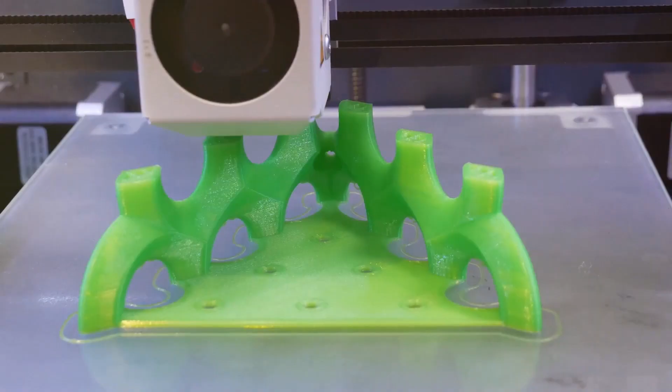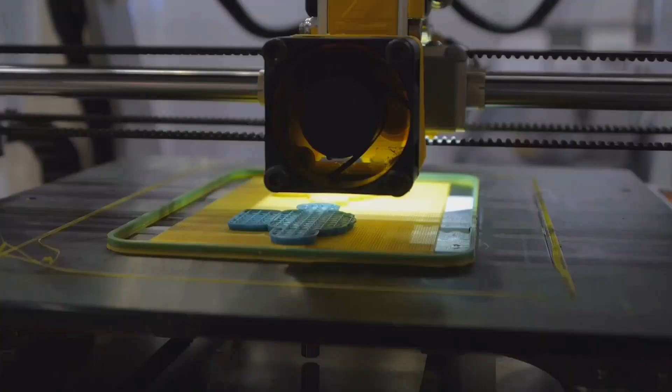In the heart of Devil and Dove, a unique fusion of traditional craftsmanship and modern technology thrives. It's a place where intricate jewelry making intertwines with the precision of 3D printing, giving birth to unique pieces steeped in personal narratives. Today, we delve into the intricacies of preparing 3D print files, a crucial element in our creation process that echoes our commitment to overcoming personal and health challenges.

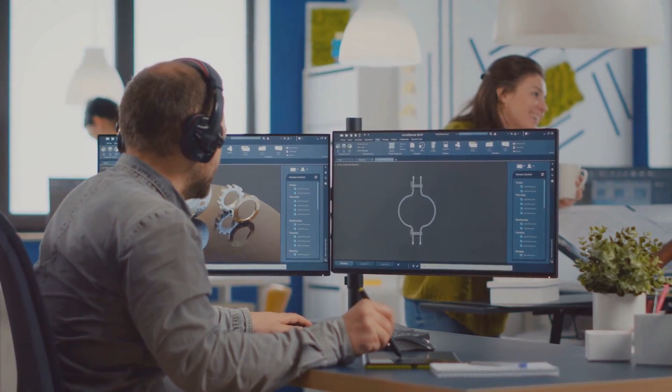3D print file preparation forms a pillar of our craft, a meticulous process that starts with the selection of the right CAD software to design and export our creations.

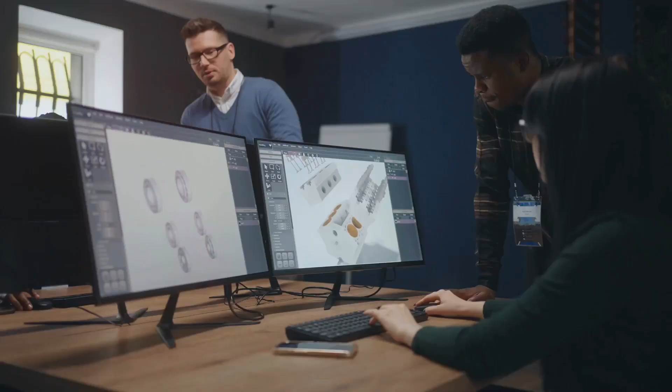The quality of your STL files is paramount, directly influencing the detail and accuracy of your final print. It's a delicate balance, understanding the interplay between high resolution for detailed designs and the limitations of your printer's capabilities.

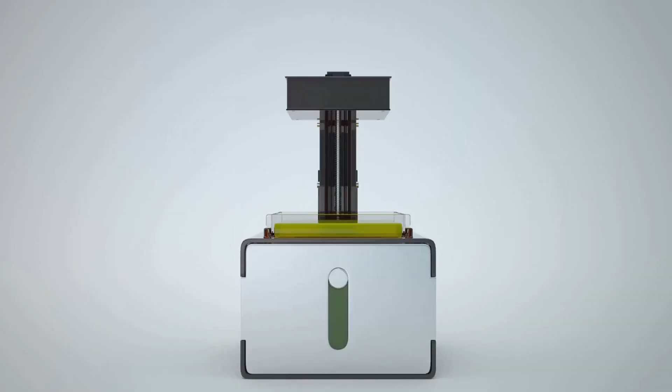The export settings, like chordal and angular tolerance, are equally significant. These settings determine how closely your printed piece will mirror the original design, impacting the smoothness and overall integrity of the final product. By optimizing these settings, we ensure each piece we create meets our high standards of quality and craftsmanship.

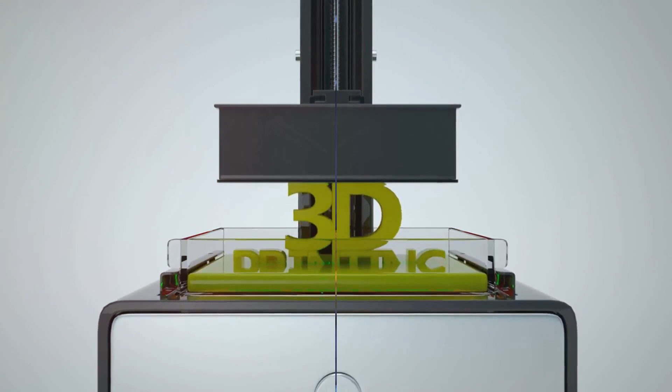The backbone of 3D printing lies within STL files, an acronym for stereolithography. Despite its simplicity, allowing for efficient printing processes, it comes with certain limitations, such as the lack of color and texture detail. However, its compatibility across various software platforms makes it an invaluable asset for us.

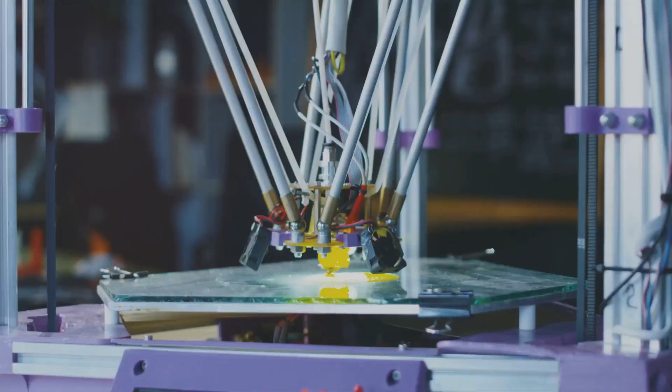Choosing software that supports STL files, from CAD applications to mesh editing tools and slicer software, is crucial. These tools enable us to refine our designs, ensuring they're not only aesthetically pleasing, but also structurally sound and true to our artistic vision.

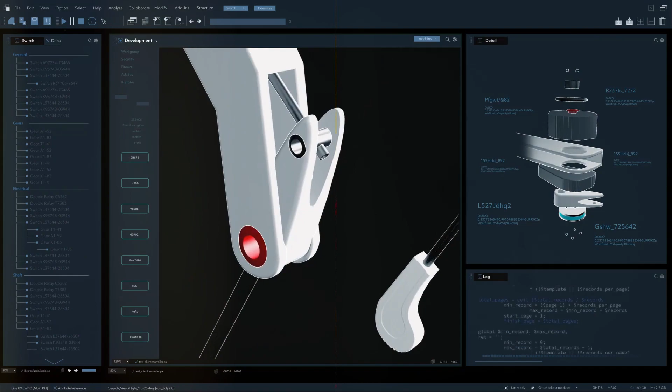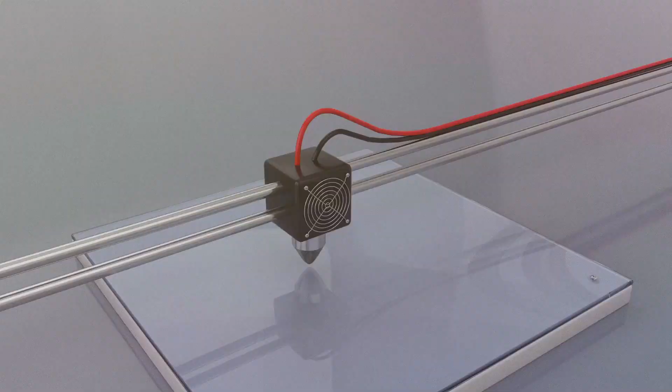Every piece we create at Devil and Dove is a testament to our journey, showcasing resilience and creativity in the face of adversity. Your support enables us to continue pursuing our passion, bringing unique jewelry pieces into the world.

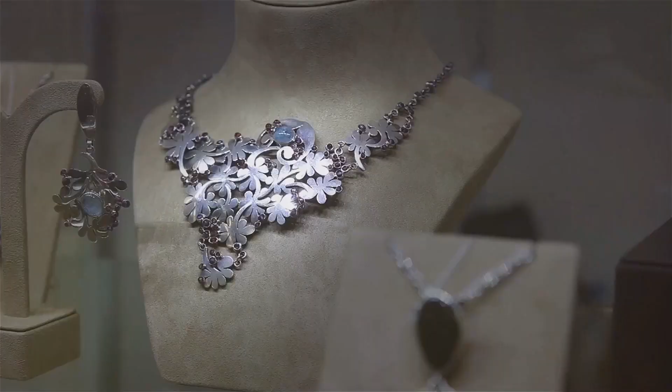Each piece is a reflection of the dedication and perseverance behind Devil and Dove, and by supporting us, you become a part of our extended family.

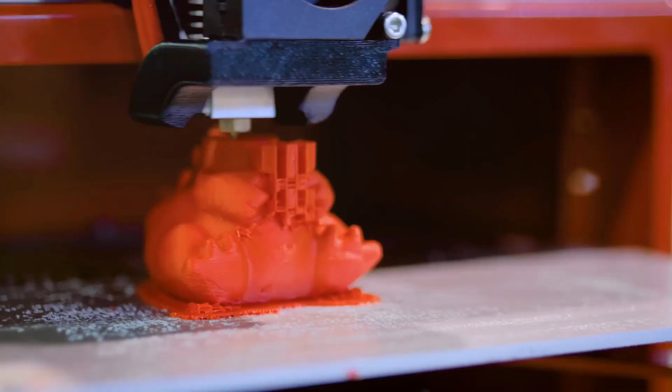As we navigate our path, we remain committed to sharing our knowledge and experiences, hoping to inspire and support others facing similar challenges. Stay tuned for more insights and stories from Devil and Dove, where every piece of jewelry and every 3D print tells a story of strength, determination, and the unyielding power of creativity.